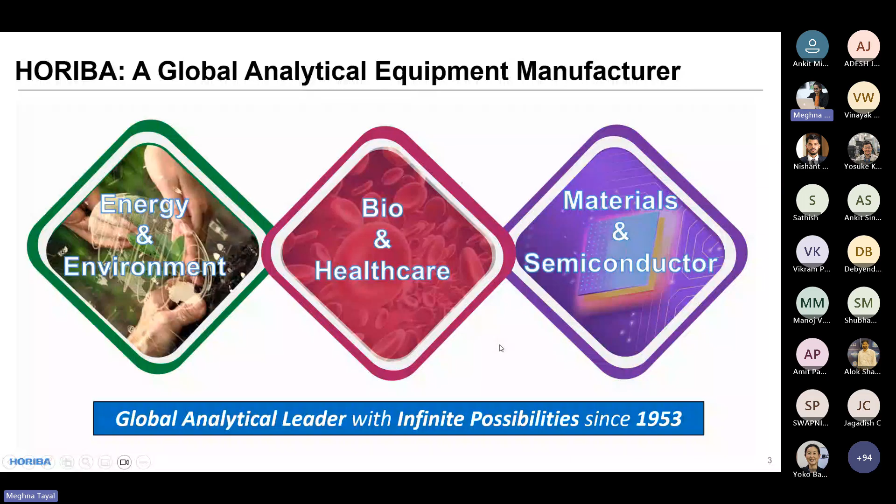But before we deep dive into the technical session, let me walk you through quick insights about HORIBA, both globally and here in India. The HORIBA Group, a global analytical leader since 1953, serving the markets of energy and environment, bio and healthcare, materials and semiconductor. We are into R&D, manufacturing, sales and service. Our head office is in Kyoto, Japan, and our organization was founded in the year 1945. Mr. Atsushi Horiba-san is the chairman and group CEO.

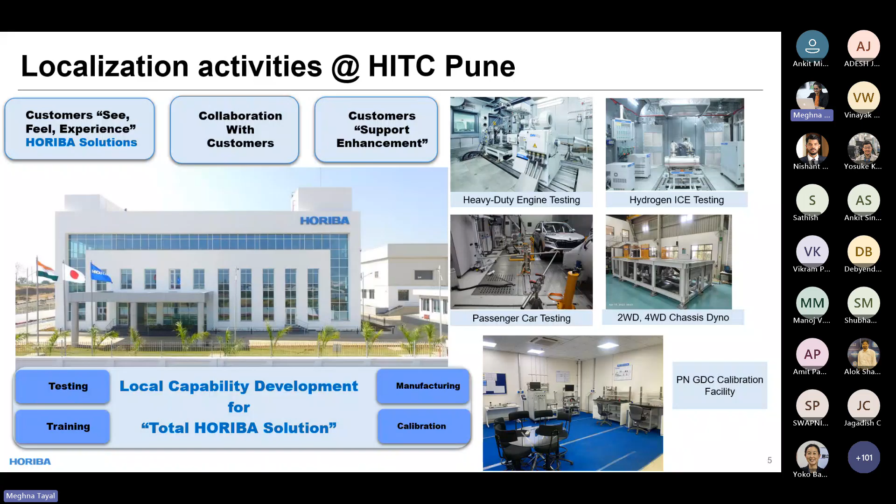Horiba India Technical Center, a state-of-the-art facility, has become a demonstration base for emission measurement systems and advanced analytical instruments. Also, very recently, we launched the hydrogen internal combustion engine testbed facility at HITC Pune, India. Our major clients are based in India and SAARC nations.

Okay, so hello everyone. Welcome to this seminar. My name is Yoko Bamba, and I'm from HORIBA, Japan. My role is researching regulatory trends and providing suitable test system solutions for our customers. I'm very excited to have this opportunity to connect with our customers in India today.

This is today's agenda. We have limited time, so let's dive into today's topic. First, I'll explain about the Euro 7 overview. What is Euro 7? I think everyone who joined this webinar has already known it, but I'll start from here as a warm-up.

Euro 7 is a unified regulation for light-duty vehicles and for heavy-duty vehicles. Previously, it was two different regulations for two categories, but Euro 7 is applied to both categories. In addition to the vehicle regulation, it establishes battery durability requirements. And regarding emission limits, it includes non-exhaust particles limit as a new element.

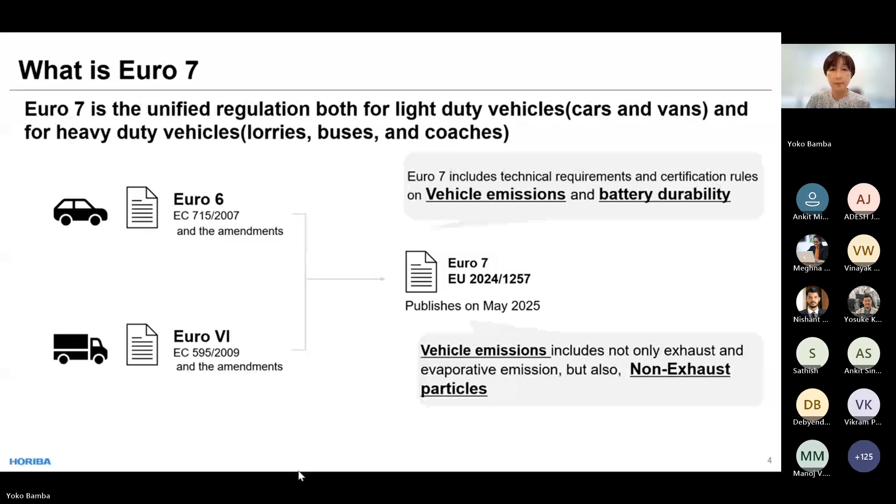This slide shows the Euro 7 requirements overview. Highlighted in blue are new requirements introduced from Euro 7. These components of Euro 7 have been decided last year. However, there are so many new items like this, and a measurement method for these items are still under development.

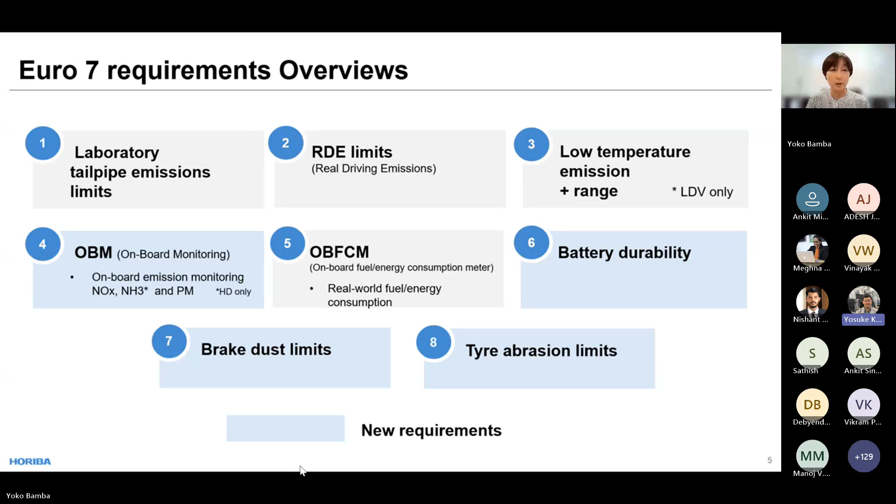This slide shows what has been finalized already and what is under development. For example, brake and tire test procedures, as well as their limits, are still being discussed. And for heavy-duty vehicles, new pollutant components will be introduced, and the measurement method for these components are still under development.

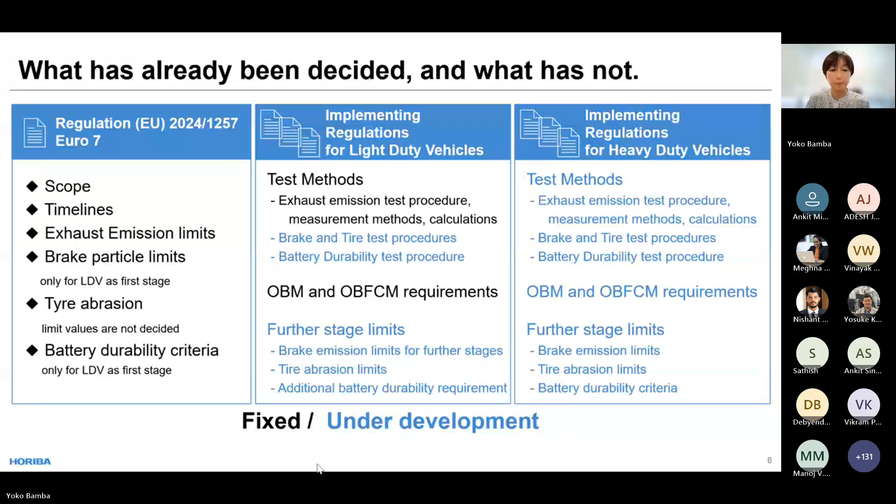So from now on, I'll explain the latest update for light-duty vehicles. On September 5th, two implementing regulations were published. One regulation mainly covers exhaust emission and evaporative emissions, while the other covers onboard fuel consumption monitoring requirements and onboard monitoring requirements. The implementing regulation defined several phases of Euro 7.

First phase of Euro 7 is called Euro 7 temp. It becomes mandatory for new vehicles from 29th November 2026. This phase introduced onboard monitoring system requirements as a new component. Second phase of Euro 7 is called Euro 7A, and Euro 7A includes requirements for brake and battery durability, in addition to Euro 7 temp requirements.

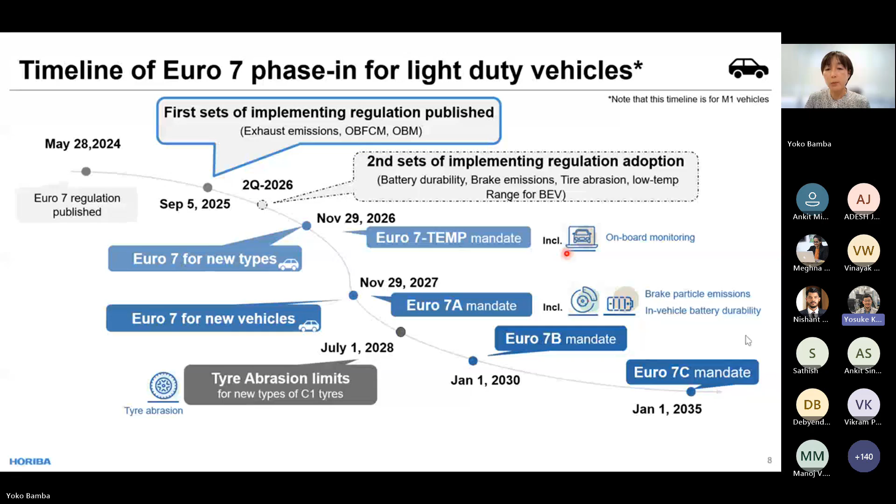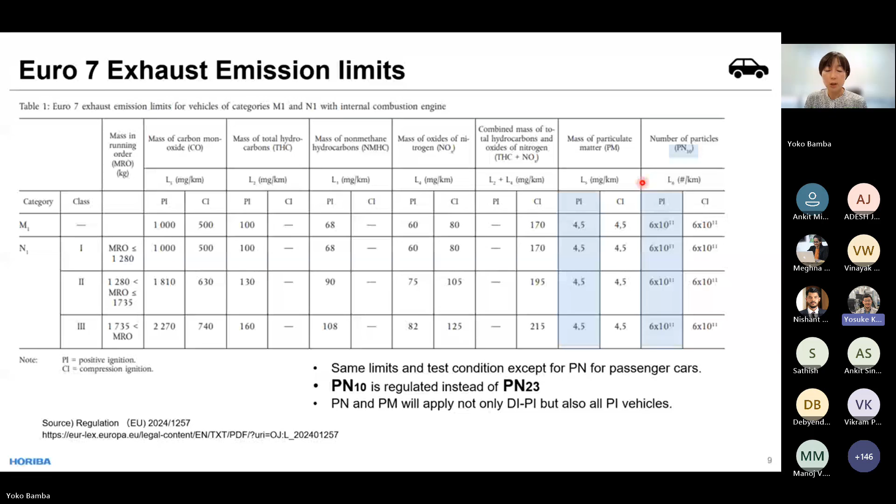Regarding exhaust emission limits for light-duty vehicles, the level remains the same as Euro 6E, except for the particulate number limit. Euro 7 will introduce a PN10 limit, which regulates more fine particles, replacing the previous PN23 limit. Additionally, under Euro 7, all gasoline vehicles must meet PM and PN limits, which previously applied only to direct injection vehicles.

Regarding brake limits, 3 phases are planned. The later stage emission limit will be set based on the United Nations Working Group report. From Euro 7B, a particulate number limit will be added in addition to the particulate mass emission limit.

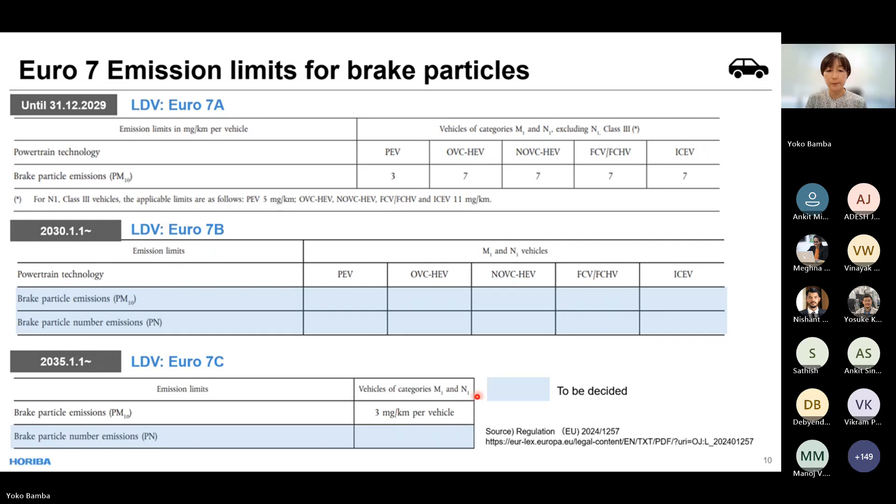As I mentioned, the implementing regulation for exhaust and evaporative emissions has been published, so exhaust measurement methods are finalized. The real-world emission measurement method is based on UN Regulation 168, and laboratory test procedures are based on UN Regulation 154. Both regulations do not include PN10 related specifications, so only PN10 related requirements are defined in this regulation.

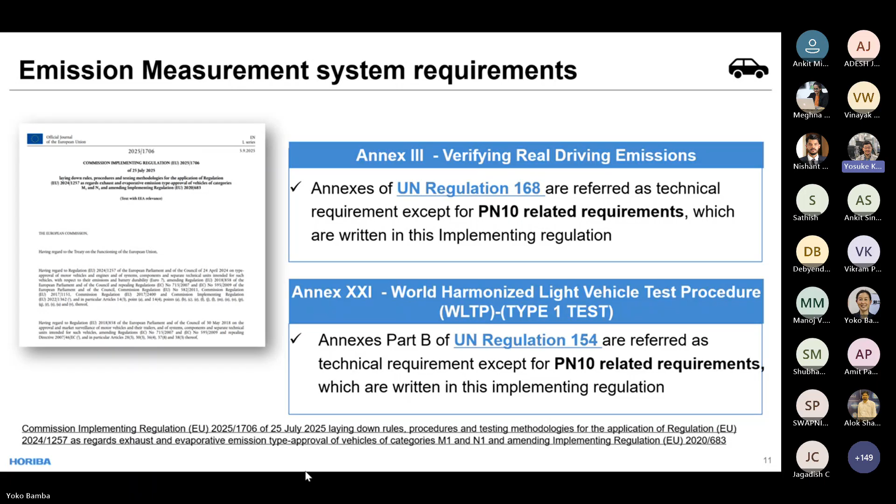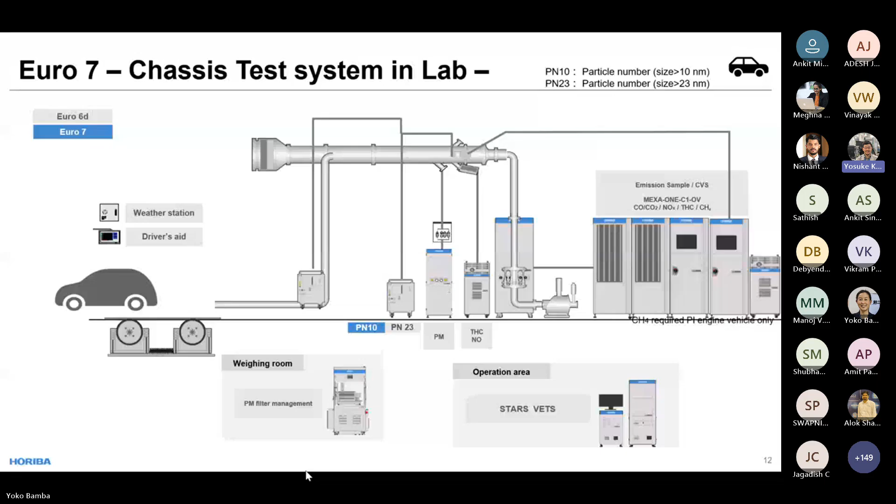The same change will be required for the RDE measurement method, and there is no change regarding the gases emission measurement system, which follows UN Regulation 168. But regarding PN, the new device to measure PN10 will be required.

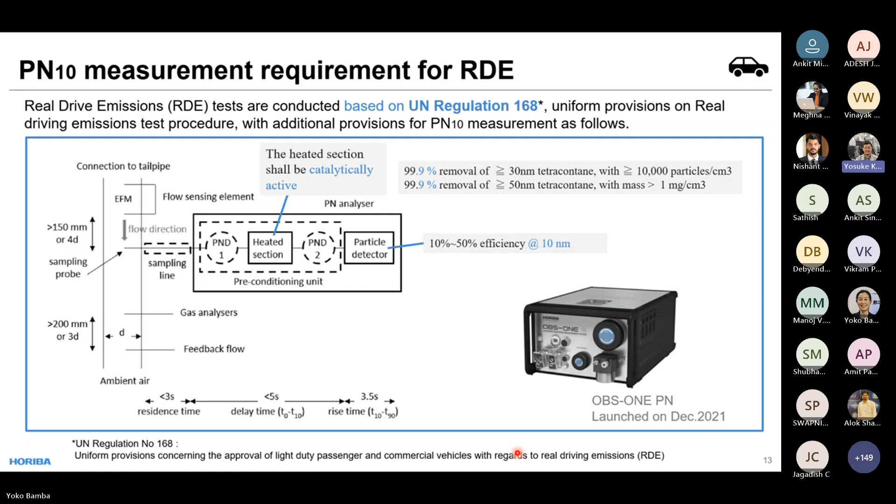Any alternative analyzer must be approved by the technical services. And here, I'm pleased to announce that the Vehicle Certification Agency in the United Kingdom approved our MEXAcube as an alternative analyzer. We will explain details about this principle and the product in a later session.

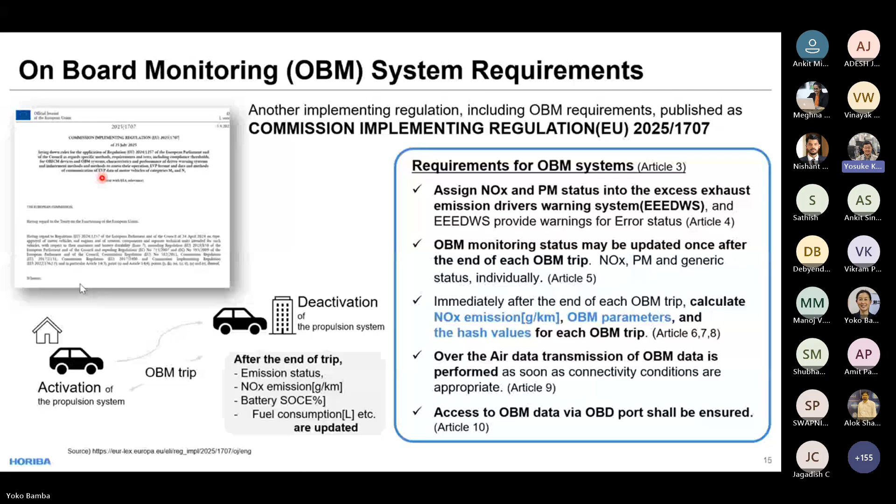The accuracy of the NOx value should be checked in service conformity. And the system functions are checked through the submitted data at market surveillance. NOx monitoring value must not be 30% lower than the emission testing system value. And our MEXAcube has a high response time, so it is suitable for development of OBM systems.

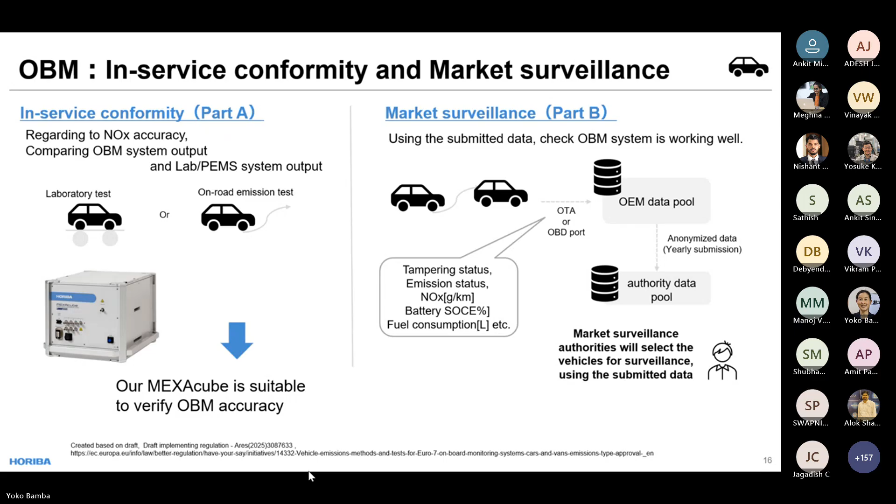Regarding other new elements—battery durability, brake emissions, and tire abrasion—evaluation methods are almost finalized in the UN regulation working group. I don't have enough time to explain those details today, but HORIBA has solutions for these evaluations also, so please feel free to contact us for your support.

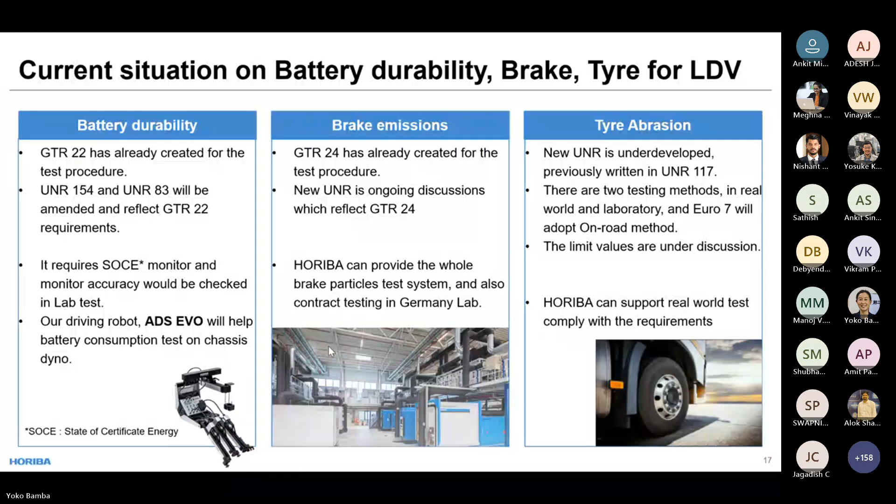Next, I'll explain the latest information about heavy-duty vehicles. This slide shows the expected timeline for heavy-duty vehicles. Same as light-duty vehicles, the implementing regulation will be developed in 3 years, and the process is planned as 2 stages.

The first stage is for emissions and OBFCM and OBM, and the second is for brake, tire, and battery durability. Euro 7 will start from the middle of 2028 for new type approval, and the tire limit will apply from 2032.

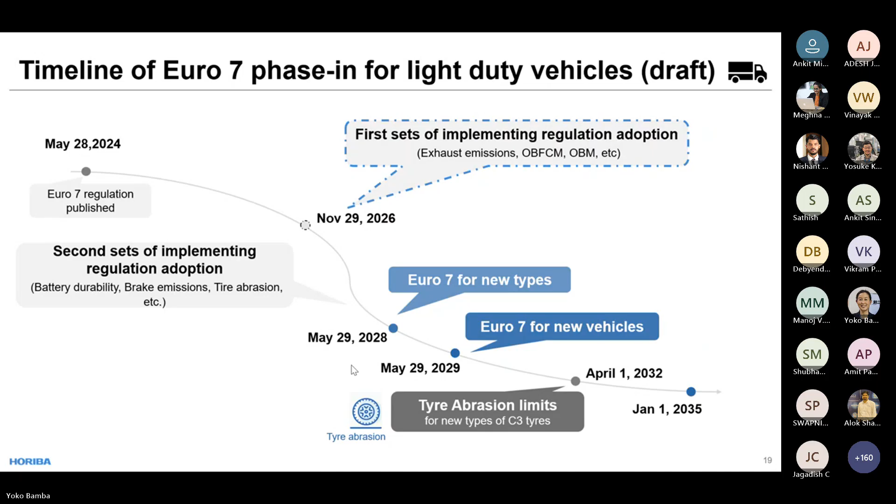This slide shows the emission limit for heavy-duty vehicles. It is a challenging limit, including new components like NMOG, N2O, and methane. Regarding formaldehyde, currently it is not listed in the table, but the formaldehyde emission level will be assessed by the Commission, and they will assess the need for a limit by the end of 2027.

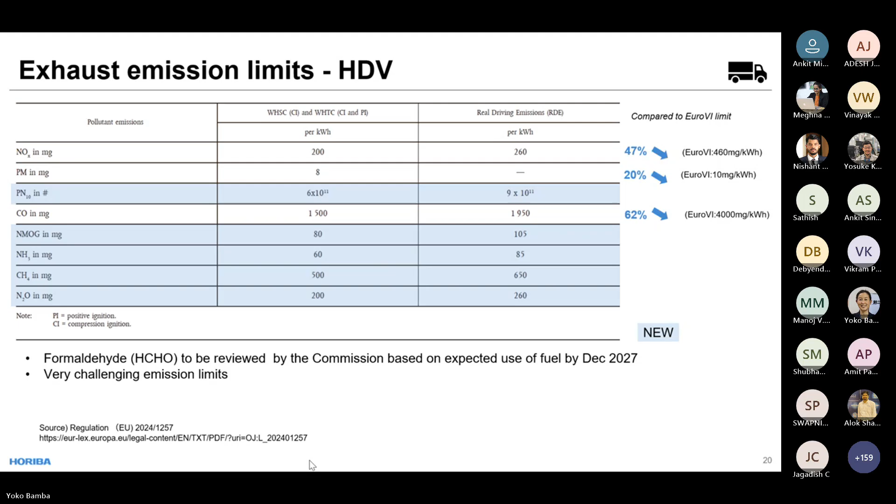Emission measurement system requirements are still under development. As shown in this table, the measurement method will follow UN Regulation 49. However, there are new components like NMOG and N2O, so it will be added to UNR 49. We expect the first set of implementing regulations will be finalized by the end of November next year.

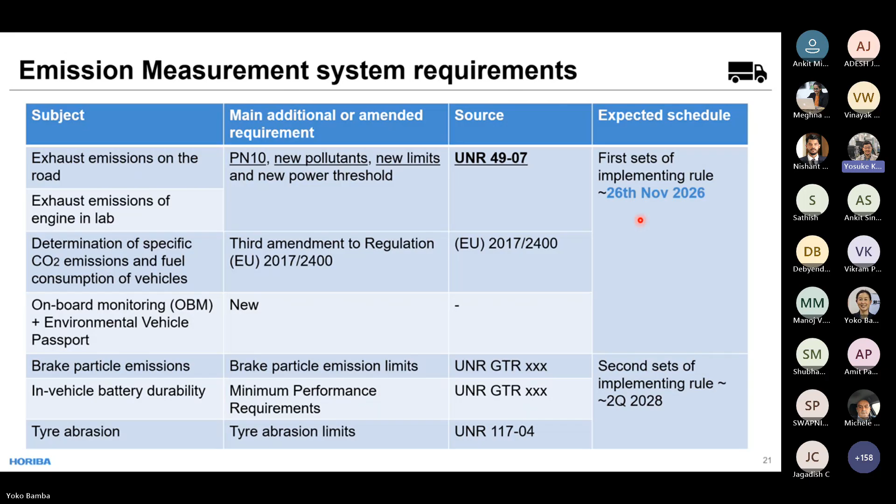One of the new components is NMOG, and we often get asked, what is NMOG? There is a definition in Euro 7 language like this, but the calculation formula hasn't been decided yet. One candidate is the formula used in the United States. It uses all alcohol and aldehyde values, and these components are sampled by impinger or cartridge and measured by gas chromatography.

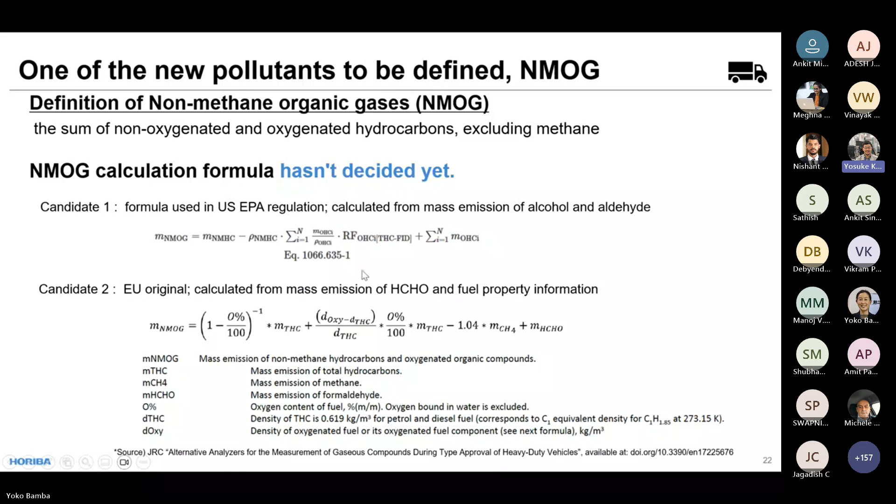Another possible formula is the EU original one, and the method uses a formaldehyde value and other fuel properties. There is also a possibility of using a constant value instead of measured aldehyde values. We expect the development of the formula will be finalized next year.

As I mentioned earlier, emission measurement method will follow UN Regulation 49-07 series, and the amendment for the regulation is under developed, and currently a draft has already been submitted and will be voted in this November.

And in the draft, QCL-IR measurement principle and FTIR will be added as alternative methods to measure raw exhaust emission. There are some conditions for alternative analyzers. For example, an alternative analyzer shall be type examined by the Metrological Institute. So not all analyzers are permitted as alternative analyzer, but we plan to have our product MexaCube type examined so that it can be used for alternative method.

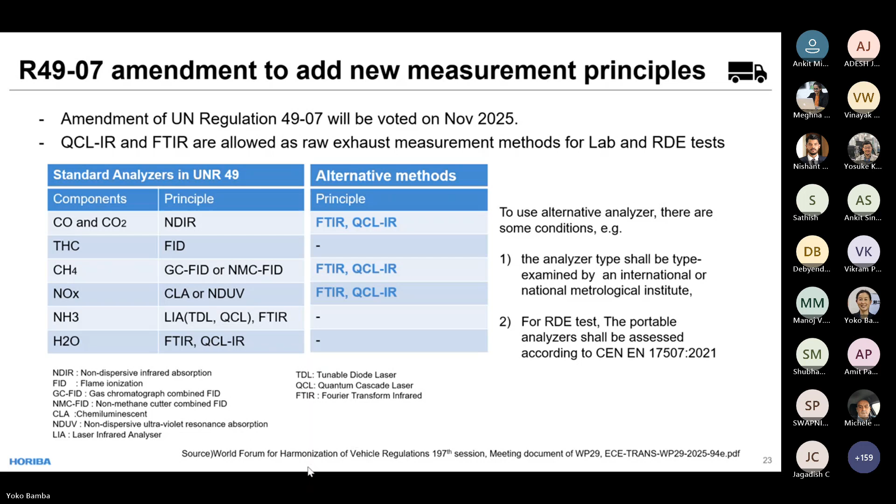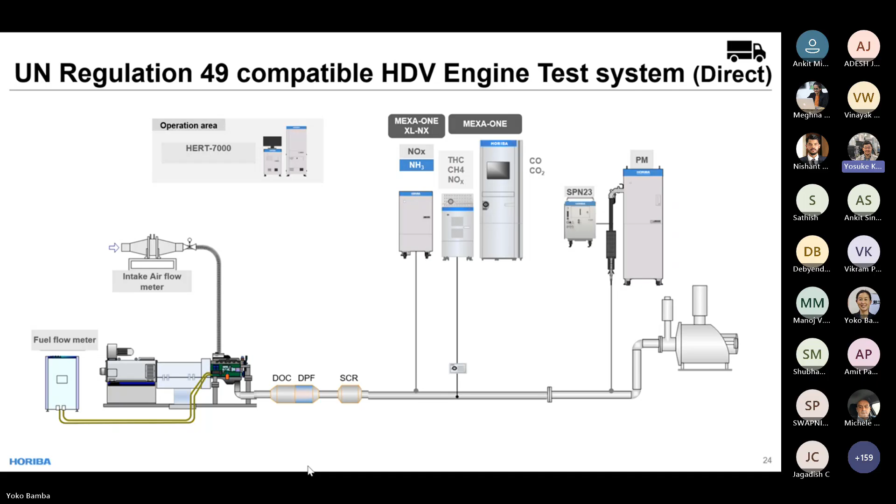This slide shows an engine test system example compatible for the current UN R49 regulation. And if the alternative methods are permitted, all the components can be measured by a new principle like QCL-IR. QCL-IR can be a compact and movable analyzer like MexaCube.

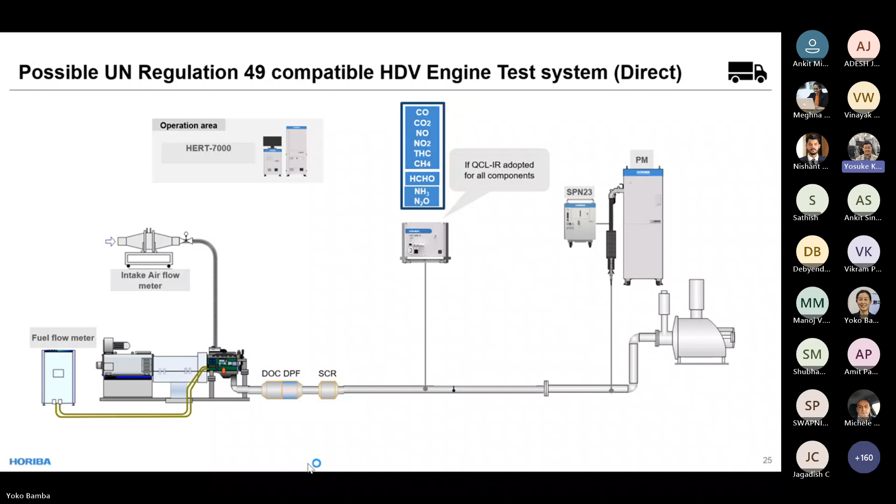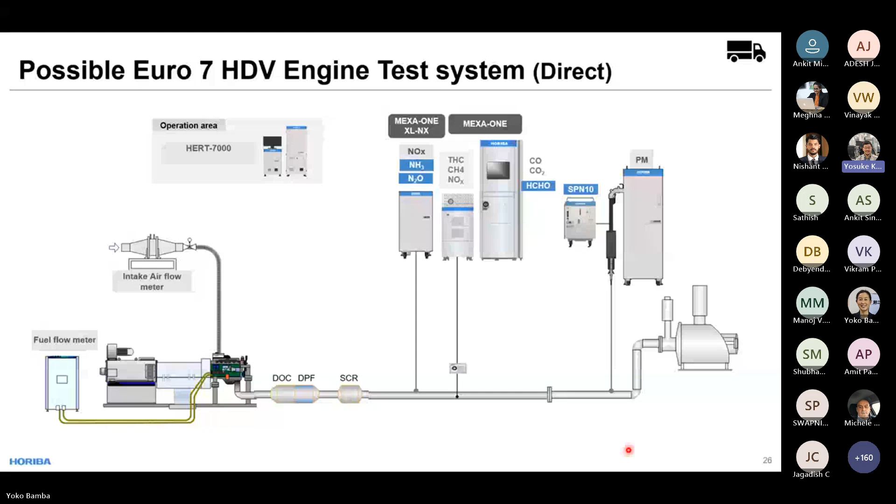Another example for a Euro-7 measurement system like this added N2O formaldehyde analyzer and also PN10 analyzer. These are new components for Euro-7. We are willing to support your test system updates with the latest information, so please feel free to contact us.

And 3 additional stages will be set based on brake emission limits. For heavy-duty vehicles, currently the implementing regulation is under development, and it is expected to be finalized next year. Second set of implementing regulation is expected later, and Euro 7 will start from May 29, 2028.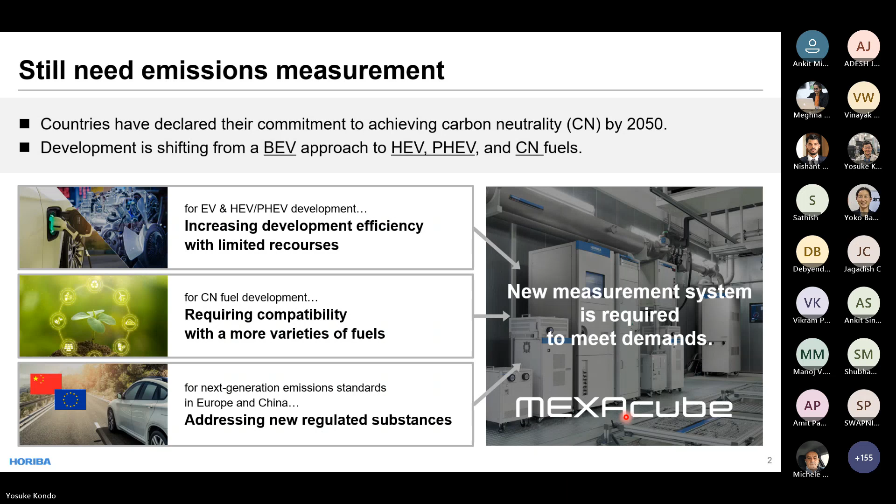To put MexaCube in a word, compact and high performance. So MexaCube is a successor of OBS-ONE, which is our conventional PEMS, but it has more potential. MexaCube is not only for RDE testing, but also testing in any R&D stages.

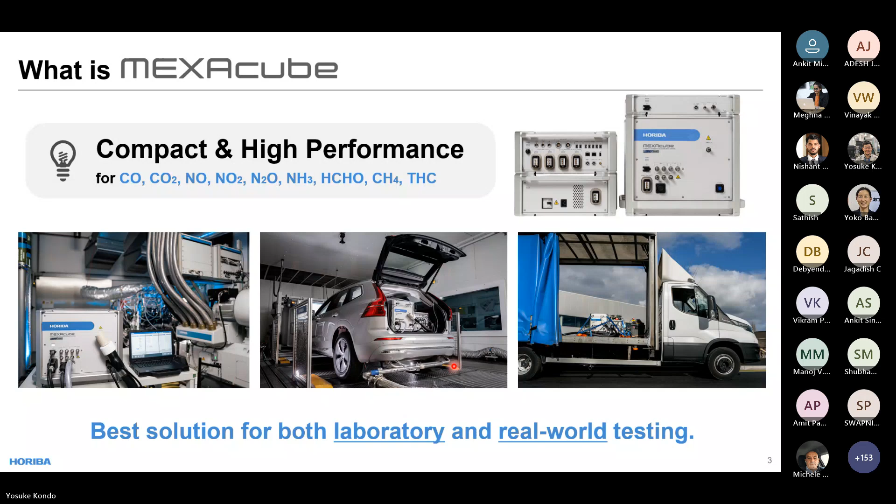What evolved from OBS-ONE? For example, the conventional PEMS, OBS-ONE, required these three analyzer units to measure all components for the upcoming emissions regulations. MexaCube integrates these three units into a single unit and adds a formaldehyde analyzer. Furthermore, the control unit and the power exchange units are also integrated into one. As a result, a highly simplified system configuration is realized.

MexaCube reduced the number of pipes and wiring by approximately 50% compared to the OBS-ONE system. When used as a laboratory analyzer, MexaCube reduced power consumption by approximately 80% compared to MEXA-ONE. In addition, while FTIR analyzers, which are one of the famous multi-component analyzers, require liquid nitrogen supply, MexaCube doesn't need such specialized utilities.

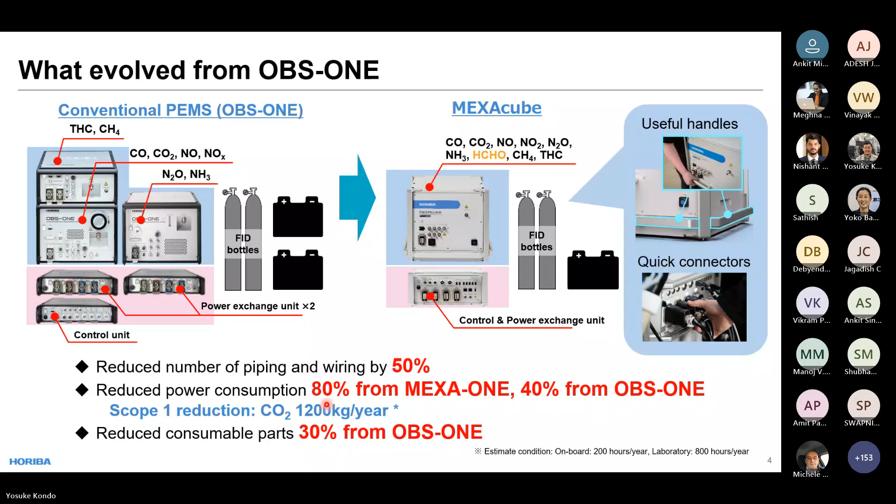So I'll explain later: MexaCube has comparable performance to the laboratory-grade analyzers. If it is used in laboratory, it can be set on a trolley. We are developing a sampling unit to utilize MexaCube for engine-out measurement. For RDE testing, MexaCube equips a whole package including exhaust flow rate, a GNSS antenna, a weather station, an OBD interface, and so on.

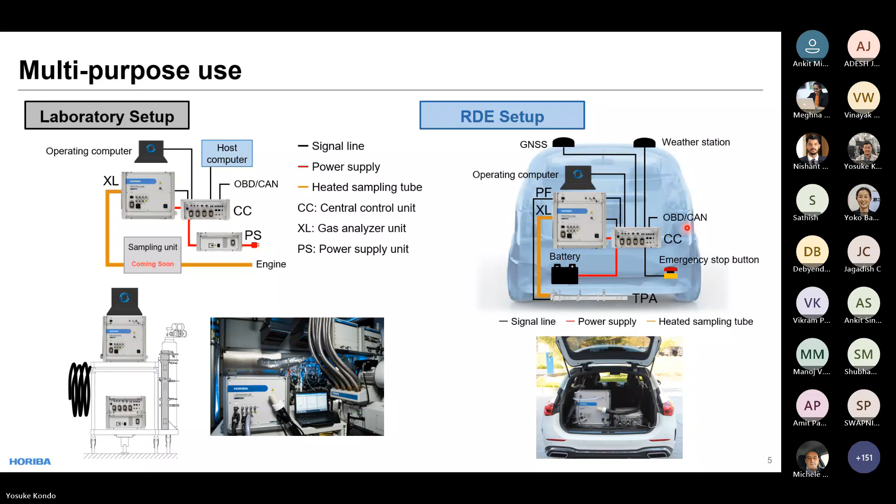MexaCube is a direct gas analyzer and can measure these 9 components. 8 components from CO to methane are measured by QCL-IR, and THC is measured by FID. This QCL-IR is a special technology developed by HORIBA, it is called IRLAM. And as you can see, this component set widely covers Euro 7 and China 7.

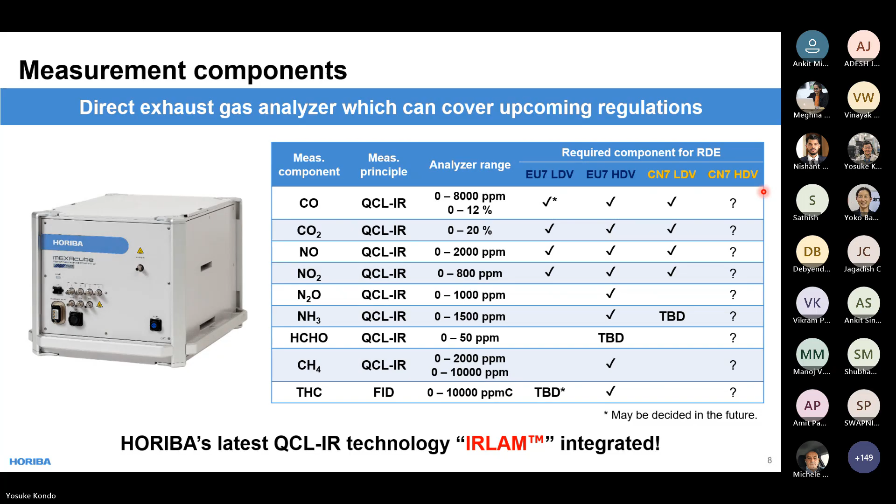I'll explain what is ALAM. There is the QCL-IR technology, which is the mid-infrared gas analysis principle, utilizing a quantum cascade laser as a light source. The basic configuration is this. A laser beam from the QCL is introduced into a gas cell and reflected multiple times between concave mirrors. Then the laser beam absorbed by gas components is detected by a detector.

The detected signals are calculated to concentrations, and there are two major calculation algorithms. The conventional one is intrapulse, and another is IRLAM, which was newly developed by HORIBA in 2021. IRLAM stands for Infrared Laser Absorption Modulation. This method gives a lot of advantages such as high sensitivity, low interference, and fast response.

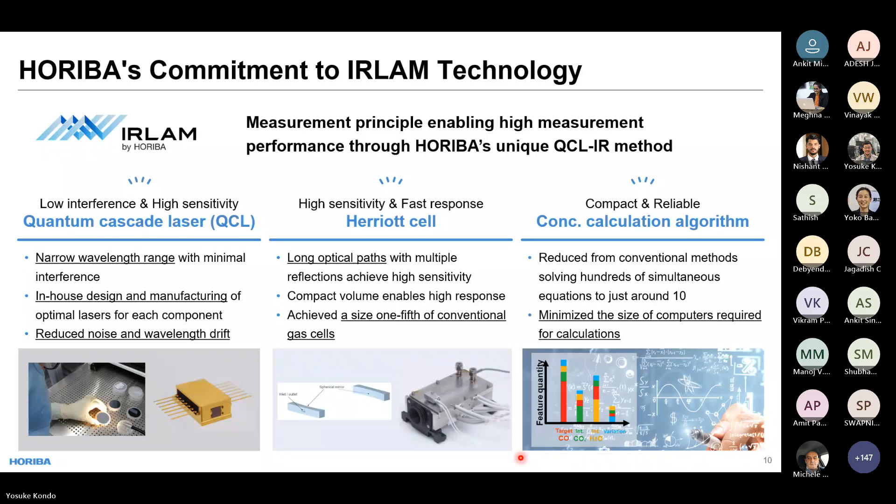As Bamba-san already talked, QCL-IR is a newer technology than NDIR and CLD, which are conventionally used for regulatory emissions measurement. So QCL-IR should be approved by each regulation. I'll explain the progress of this. As Bamba-san said, for Euro 7 LD RDE, this is very hot news. MEXAcube has been approved as an alternative analyzer by VCA in the UK for UN R168, which is the uniform provision of the LD RDE approval. For Euro 7 heavy duty, laboratory, and RDE, the latest UN R49 07 amendment allows QCL-IR as raw exhaust measurement methods.

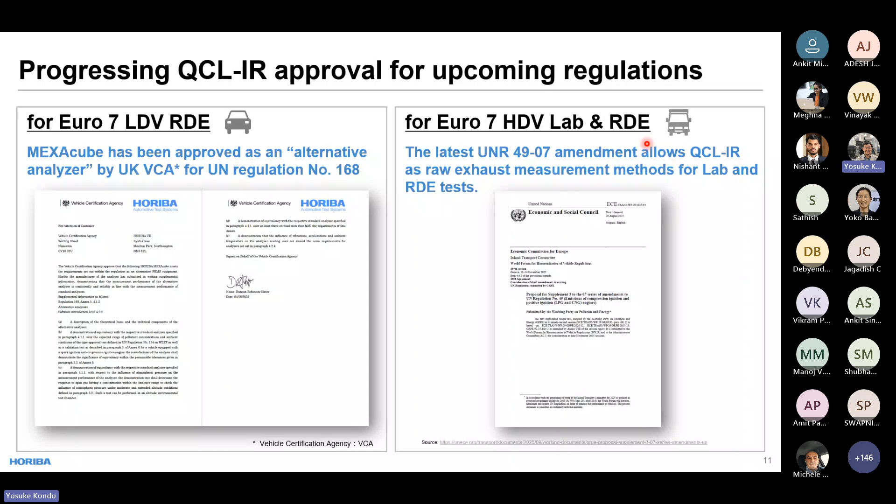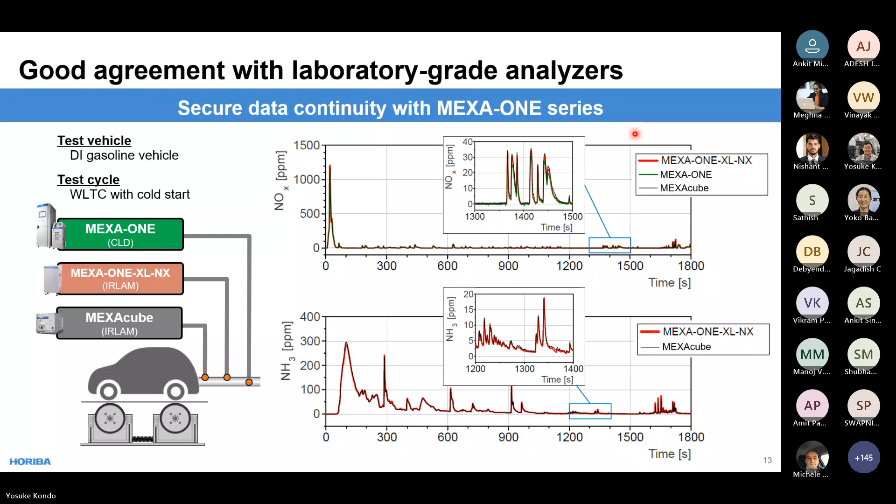MEXAcube has good agreement with the CVS method as well. These data were a comparison between both. We performed more than 10 tests in multiple laboratories and plotted results on the graphs. The horizontal axis is CVS mass, and the vertical axis is MEXAcube mass. As you can see, the slope of the regression line was close to 1.0, and the determination coefficient was almost 1.0. The NOx result was as well.

What we can say from these results: MEXAcube is suitable to evaluate emissions as mass in upstream processes. For example, a transient operated engine test cell.

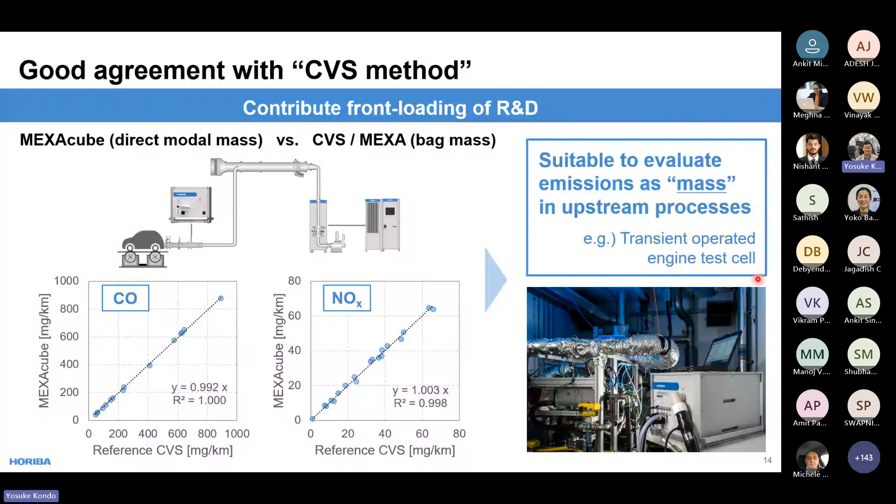Let me mention capability against carbon neutral fuel emissions. The challenge for emission analyzers is high moisture from combustion compared to conventional gasoline and diesel exhaust gases. For example, let's see this graph. Gasoline, orange bar, around 14% of H2O. But CN fuels, carbon neutral fuels, more than 20% H2O. Conventional technology against high moisture is a dehumidifier and a scrubber in a sampling line. But MEXAcube doesn't have both. It measures high moisture exhaust gas directly as wet.

But the interference effect against high moisture is very small. This graph shows it. The horizontal is the measurement component measured by MEXAcube, and the vertical is the magnitude of interference effect against 24% of H2O. As you can see, interference of all components was less than 1 ppm. We can say MEXAcube is a suitable tool for carbon neutral fuel emissions.

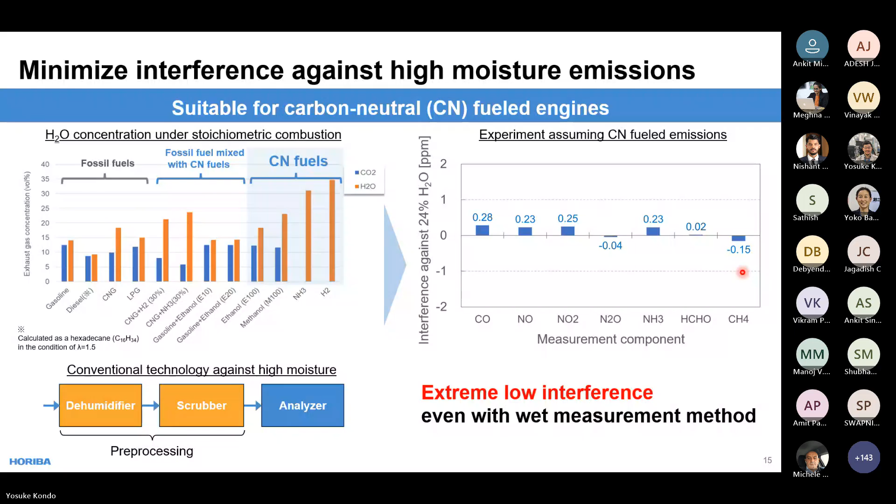The next is high stability. The biggest challenge in RDE testing is analyzer drift because environmental conditions are changing during tests. Don't worry about this with MEXAcube. This is regarding ambient temperature. When the temperature changes from -10 to 45 degrees Celsius, span error shown on the vertical axis was within ±2%. This 2% is the drift criterion in RDE tests in the regulations. In terms of ambient pressure, span error kept within ±2% as well up to 3,000 meters.

And we can show the real vibration effect taken on a proving ground. A vehicle with MEXAcube and span bottles drove on Belgian pavé while providing span gas. This was a very hard condition compared to actual public roads. However, as you can see, there was no impact on MEXAcube, even when more than 10G acceleration was observed.

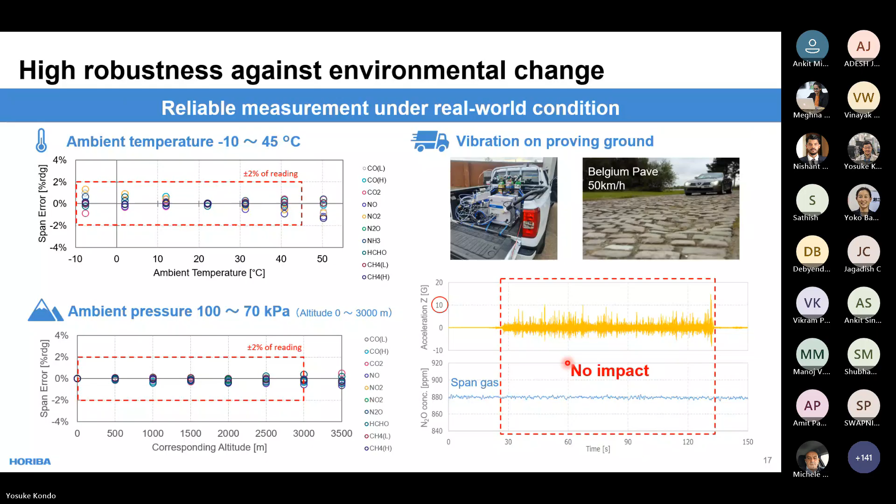Calibrating the analyzer every day can be a bit of a pain for all users. MEXAcube would release you from stress in span calibration. This graph shows the stability of span sensitivity of the analyzer. We performed zero and span calibrations prior to chassis and RDE testing, as usual. At that time, calibration coefficients were recorded.

Then, we analyzed the variation of analyzer sensitivity. The sensitivity was kept within ±2% for 6 months. You may not need daily span calibration in RDE tests.

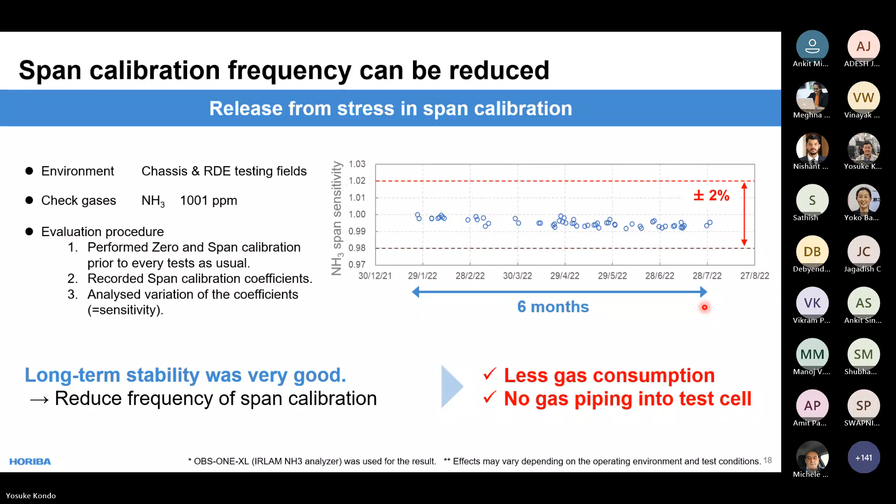Next is compact. I'll explain a case of battery EV test cells. Currently, one guy is struggling. He has a lot of battery EV dedicated test cells, but he wants to develop PHEV now. He considered adding a CVS system in the battery EV test cell. However, there is no space for it.

MEXAcube will solve this problem. MEXAcube is a compact system, so it can be installed in a small space. He doesn't need large construction. And this is enabled because MEXAcube has good agreement with the CVS system. As MEXAcube has its own test sequence function, he doesn't need a brand new test automation system. This is a much cheaper solution. We can use similar things for other types of test cells.

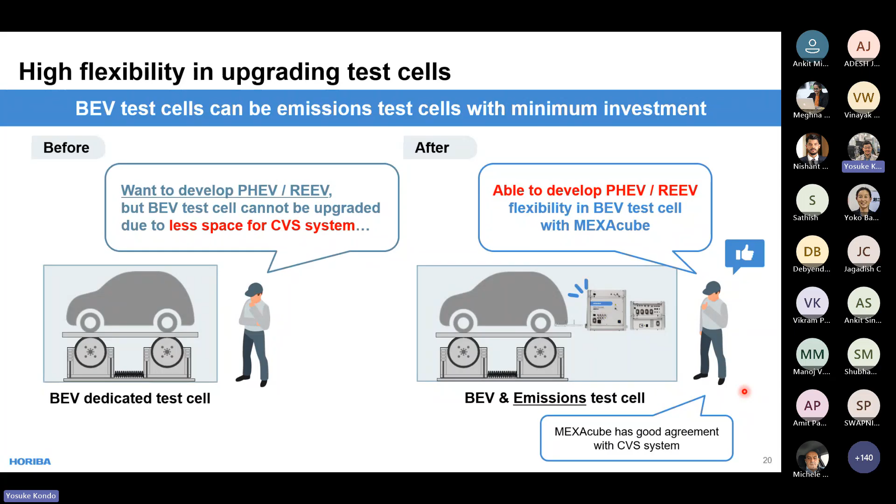Finally, movable. Conventionally, testing equipment is installed inside test cells, but investments are necessary for each test cell. So this is not suitable under current circumstances. We can propose new cost-effective operations of testing. Let's share MEXAcube among the test cells.

Step 1. Calibrate MEXAcube in a preparation room. As I already explained, MEXAcube is very stable against environmental changes, so this becomes possible. Step 2. Carry MEXAcube into the test cell. This is allowed because MEXAcube is strong against vibration. And if we use a battery as the power source, MEXAcube can keep standby.

Step 3, run an emission test. MEXAcube requires just a general power outlet, which is easy to get. Of course, locations that don't have analyzers, like a powertrain bench, can be emission test cells.

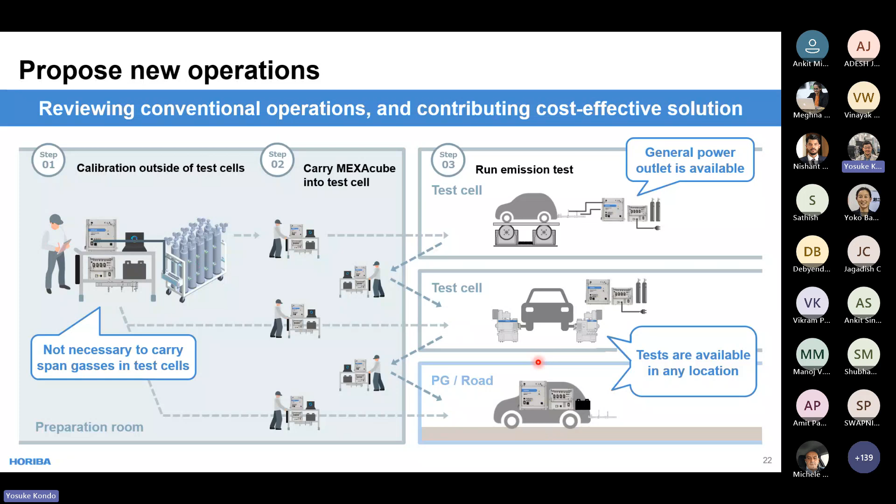So this is the summary. HORIBA supports highly efficient and cost-effective development, contributing to the realization of a sustainable society.

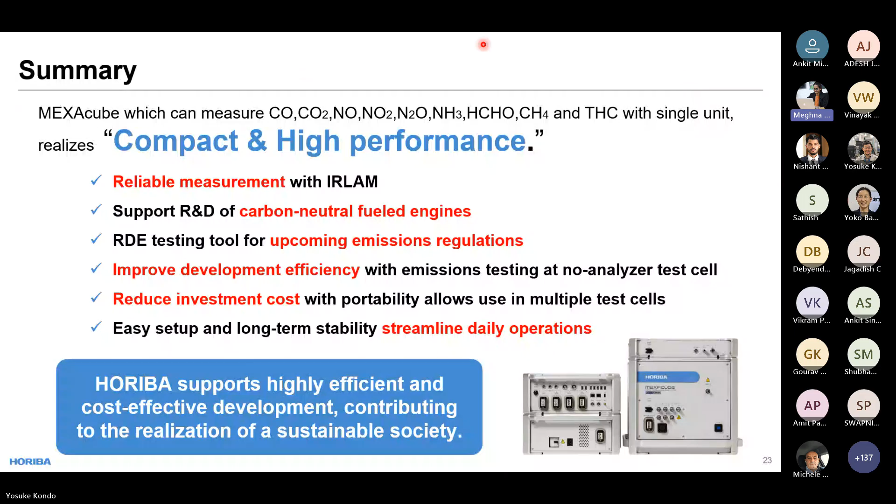So first question: does HORIBA have any system for two-wheeler RDE testing, by Mr. Vikram? I have also enabled the mic for all who have asked questions, so Mr. Vikram, you can also speak if you wish to. I'll just repeat the question. Does HORIBA have any system for two-wheeler RDE testing? HORIBA team, could you please answer the question?

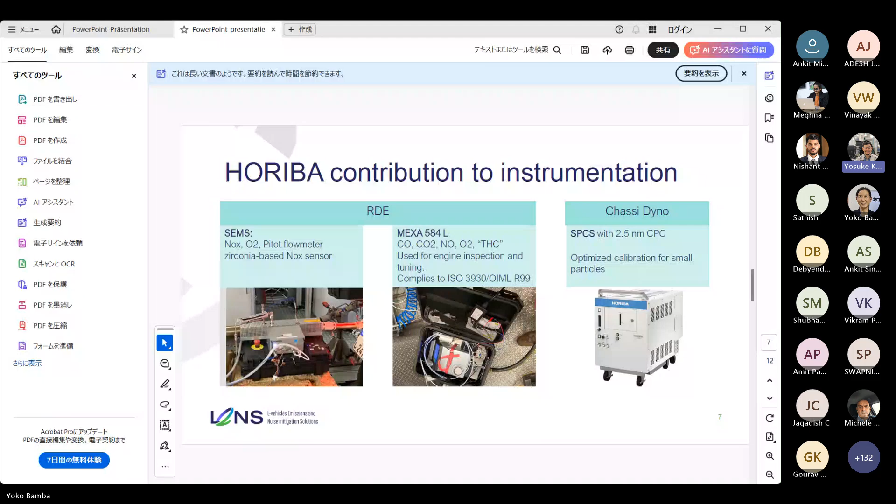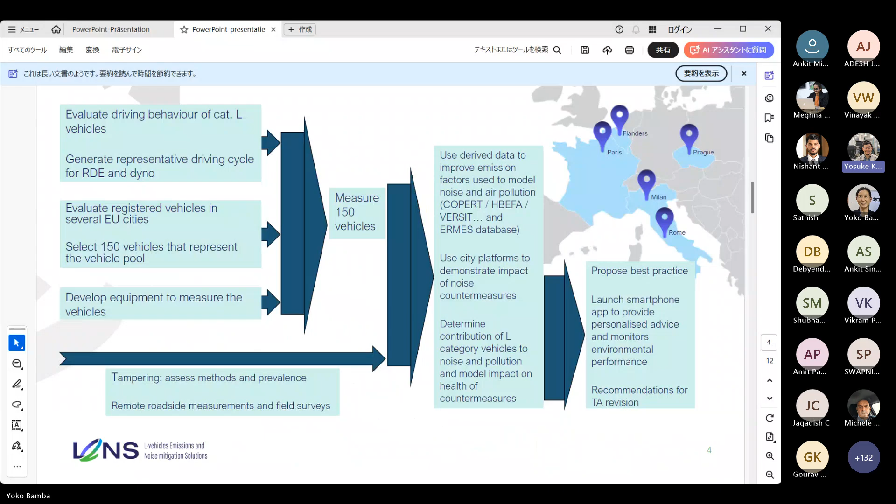Kondo-san, I request you to please answer. Yeah, sorry. I'll share my screen now. Actually, we don't have a product for RDE testing for two-wheeler motorcycles, but we had experience joining research in the EU conducted for motorcycle real-world emission testing. At that time, we provided our product as a prototype.

One of them is based on MEXA-584L, an analyzer for idling testing. It was used for the motorcycle RDE evaluation. So we don't have a product, but we had an opportunity to measure and join such a project. That is the answer to this question. I hope your question is answered, Mr. Vikram. Yeah. Thank you.

So the next question is: is the QCL-IR analyzer for advanced testing of air pollutants only, or can it be used for CEMS applications in coal or oil-fired thermal power plants also? I'll repeat the question. Is our QCL analyzer for advanced testing of air pollutants only, or can it be used for CEMS applications in coal or oil thermal power plants also?

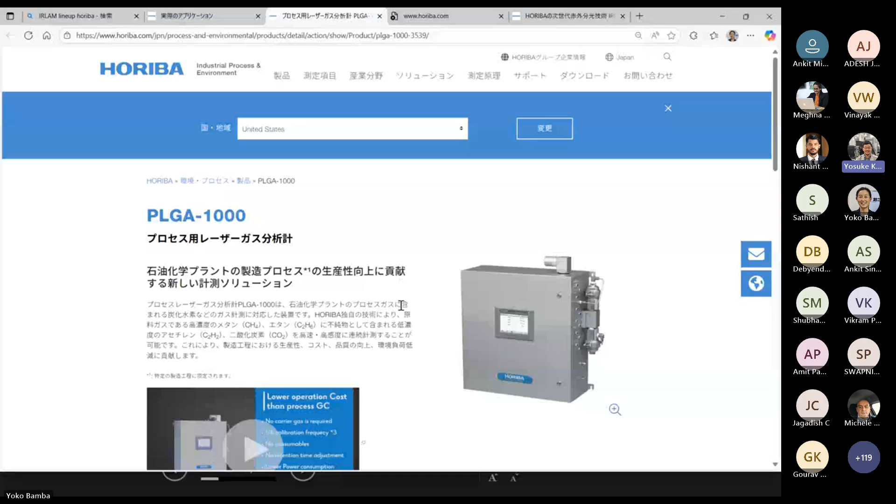Two seconds. I'll share my screen again, and I'm sorry to share a Japanese site. I hope I can find an English site for it. We have a QCL analyzer product, which is not only for exhaust emissions of vehicles, but can also be used for process exhaust assessment.

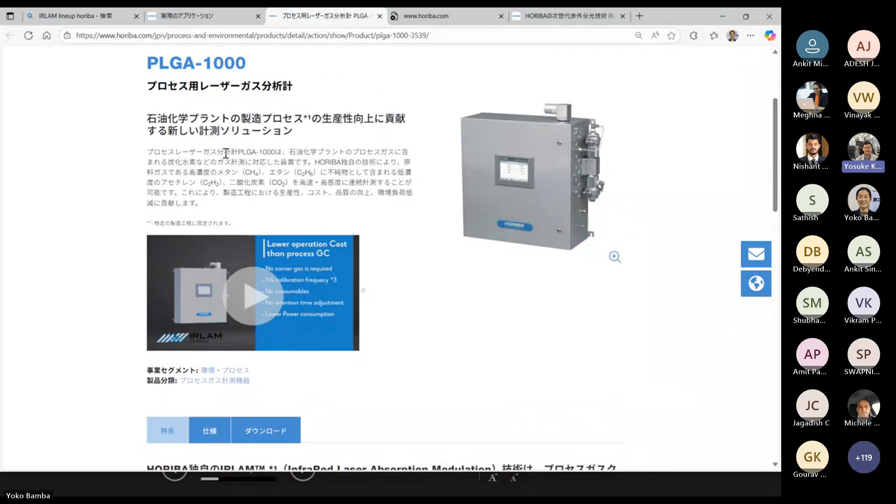The name of the analyzer is PLGA 1000, and I'm sorry I can't find the English website now, but I will put the information in the chat box as soon as possible after finishing this answer. So you can use this for CEMS also, and you can use this for evaluation in the process gas. Thank you again.

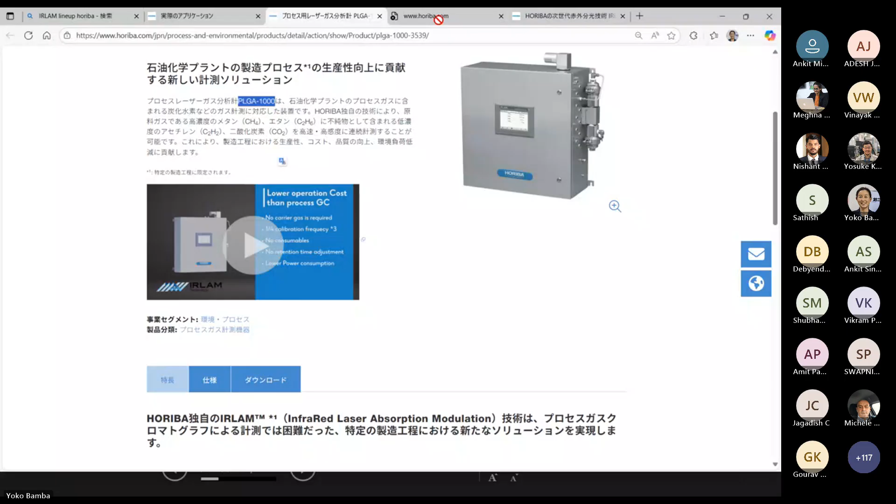So we'll also be sharing the English version of what Yoko-san just explained in the chat box. So next question by Mrs. Swapnil-san: have we done any correlation activity between OBS-ONE and MEXA-CUBE? If yes, then what is the percentage? Sorry, you skipped one question, maybe. Okay.

So this is extreme low interference even in wet measurement. Water compensation algorithm is not used in this analyzer? Actually, our algorithm has water compensation, but it depends on laser oscillation wavelengths. So some components have compensation against water in the exhaust gas.

All right. So the question from Mrs. Swapnil: have we done any correlation activity between OBS-ONE and MEXA-CUBE? If yes, then what is the percentage? Yes, we did. The correlation between both was good, but MEXA-CUBE has better correlation with the laboratory grade analyzer, because MEXA-CUBE has faster analyzer response time than OBS-ONE.